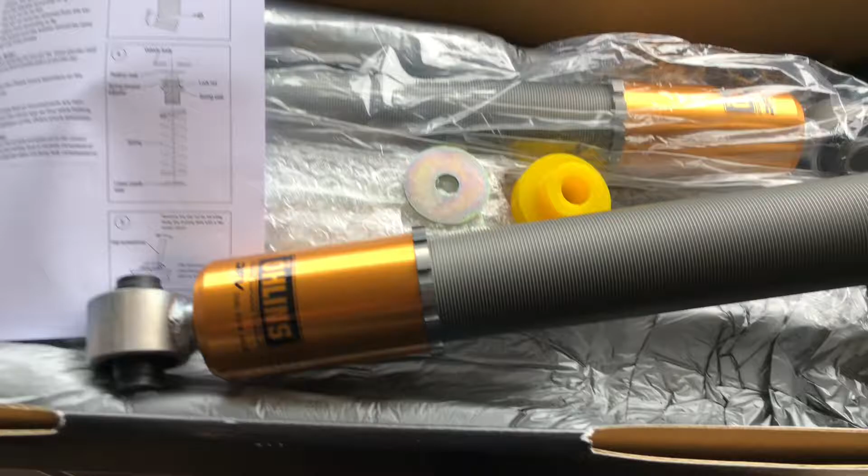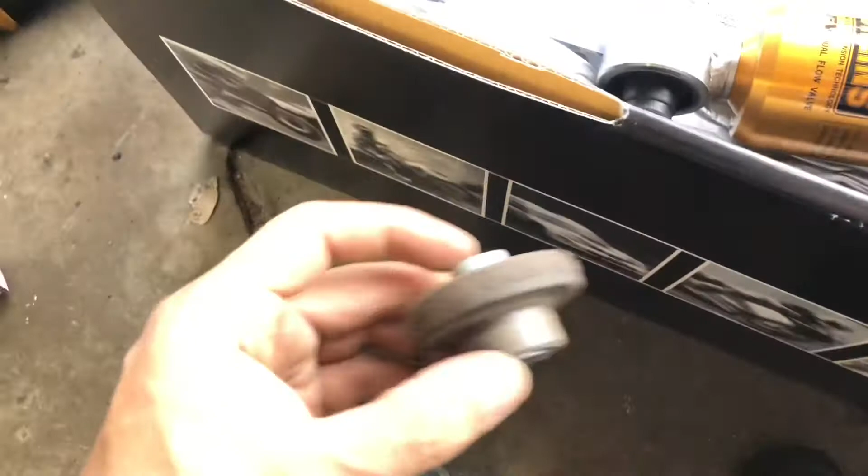So I got these Ohlins Road and Track coilovers for my E90 M3, and I'm trying to upgrade to these Powerflex bushings instead of using these beat up OEM ones. There's no clear instructions, so I'm just gonna try to figure it out.

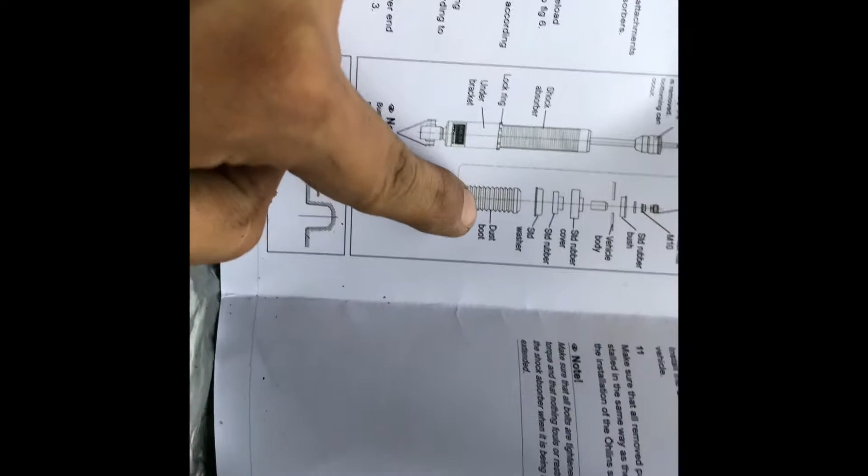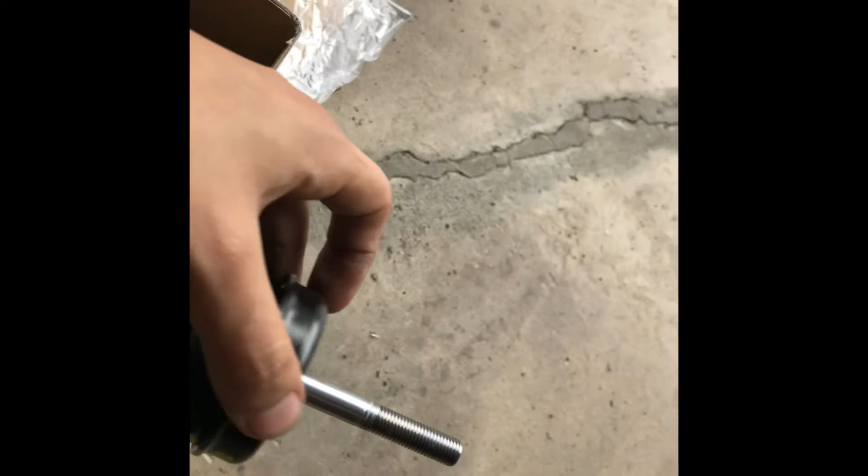So if you look at the instructions, it tells you to cut the dust boot that comes with it. It tells you to cut it 82 millimeters from the bottom. After that, you're gonna use the OEM stud washer, which is this black thing right here. After that, it wants you to insert the stud rubber in the stud cover, but the stud rubber is obviously this Powerflex one. So you wanna go ahead and just lubricate it with the silicone, whatever came with it.

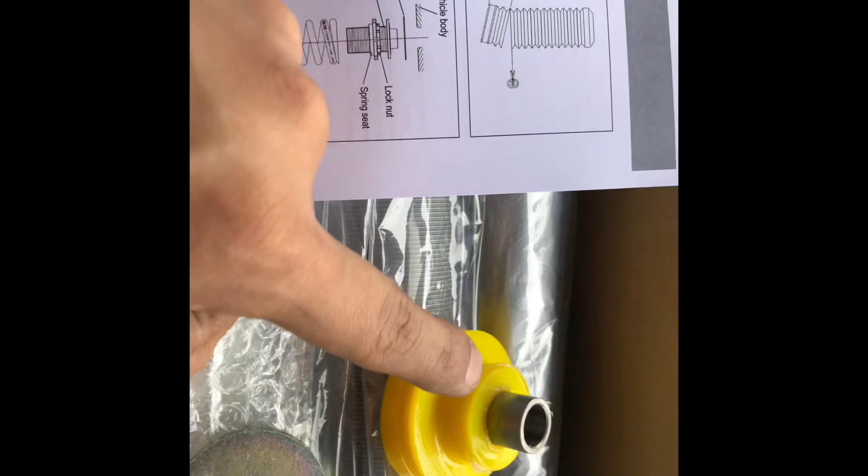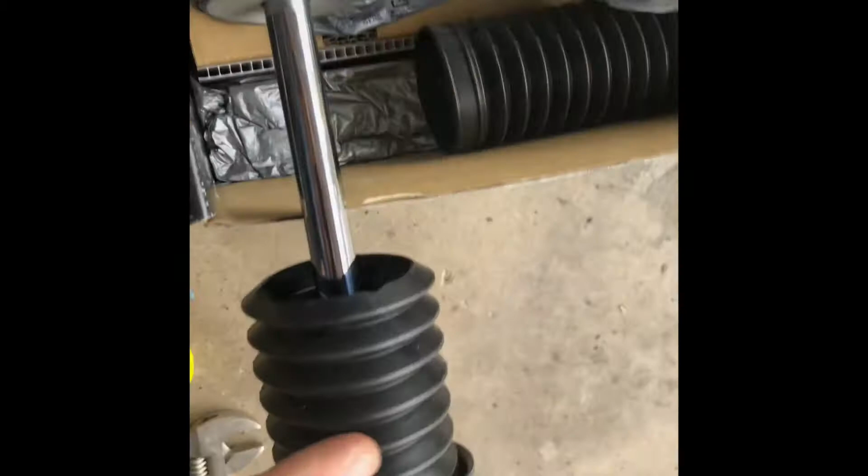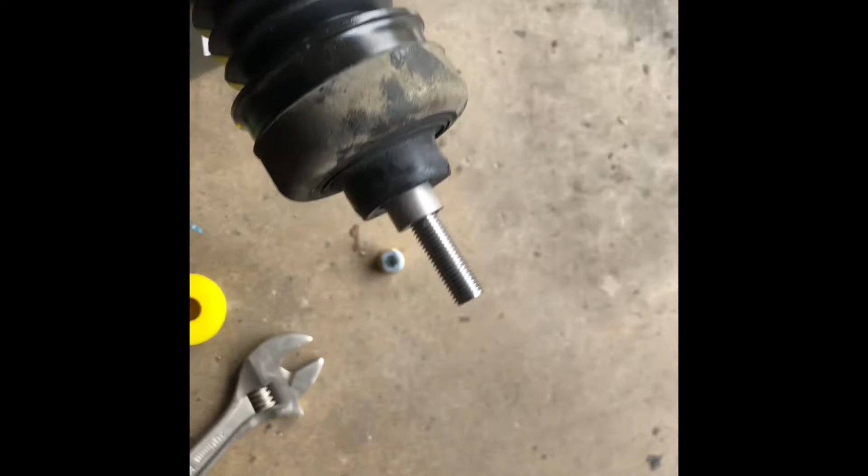So I went ahead and did that, and because mine had EDC, mine came with the spacer, so I went ahead and put that in. After that, you're gonna reuse your stud cover, which is this right here. I'm just gonna slap that on. Basically, you cut the dust boot, and then you put the washer in there, and you can see it's in there. Settle that in.

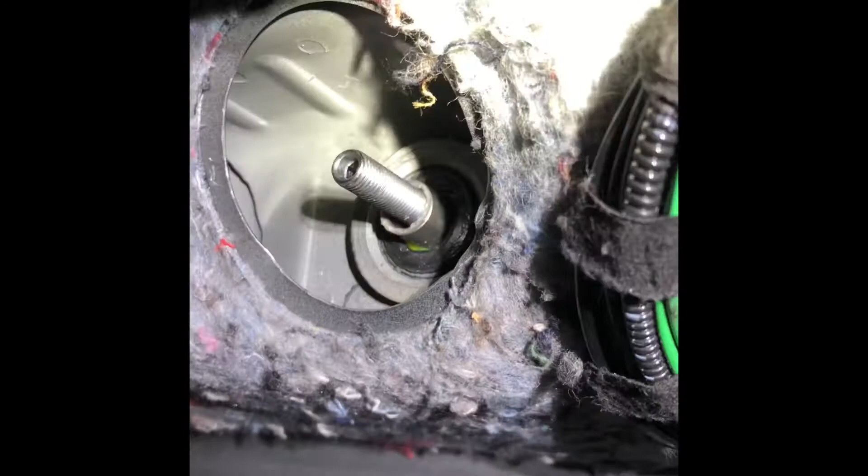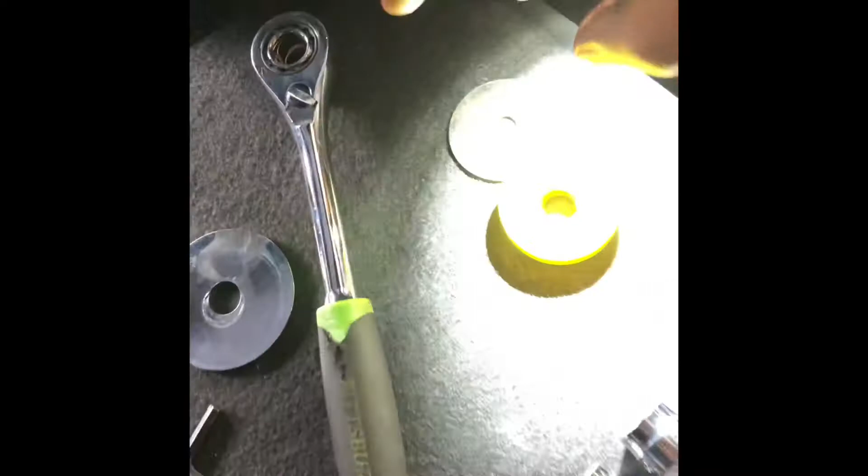So once that's ready to go, it also comes with one more, which is this right here. This is what's going to hold it from inside the trunk liner. So basically, once you feed the shock through into the car, you'll see the spacer sticking out. You just want to go ahead and put the other bushing from the Powerflex and then a spacer on top. That's pretty much it. And then you just want to go ahead and tighten it down. You are finished with that.

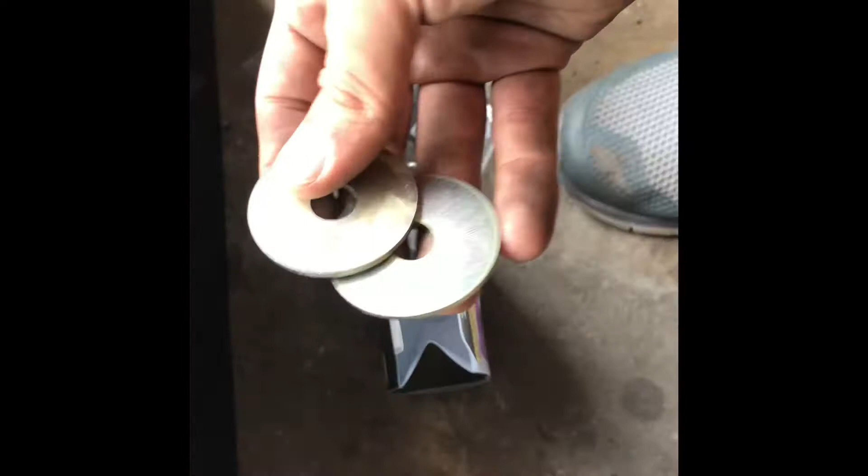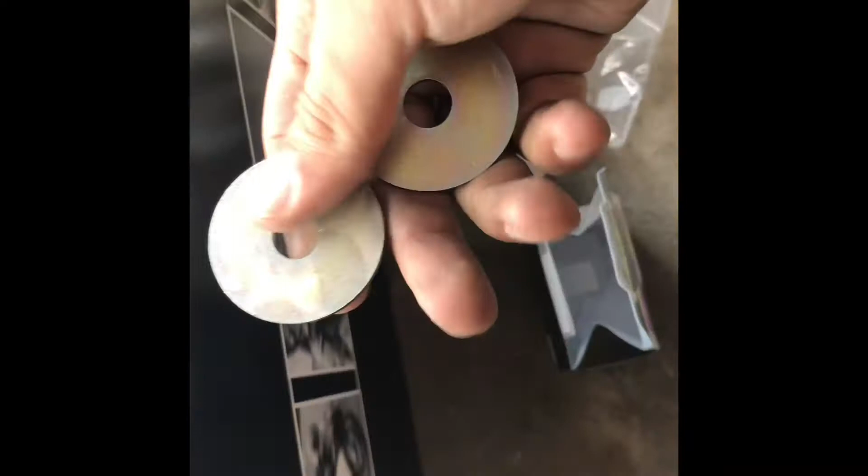So these Powerflex bushings do come with 2 spacers, and I'm assuming that the other spacers would take the place of using the stock washer. But I just went ahead and used the OEM one, and I'm just not gonna put this one on. Here's a little angle from the inside.

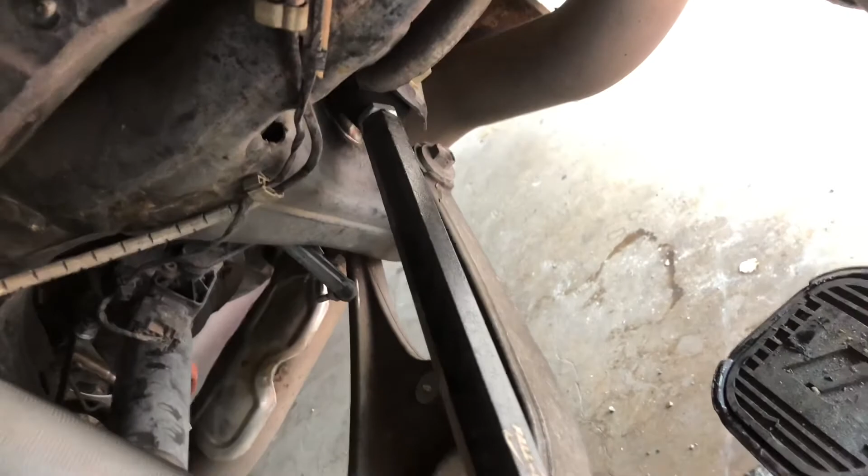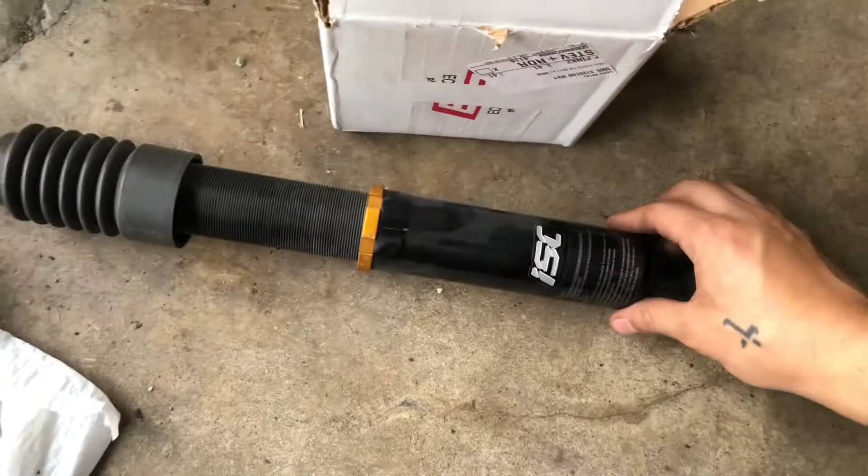I also have the Fall Line Motorsports rear tail control arm. And I'm upgrading from the ISC coilovers. They were okay. They were really good for street use, but for more like a track, they just weren't cutting it, so I upgraded.